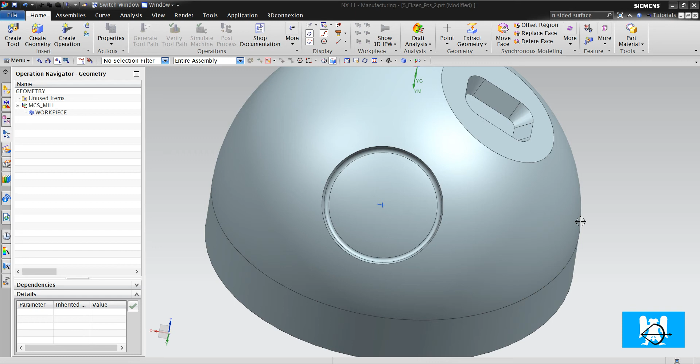Hi, I'm Yusuf. In this video, we will make the CAM operations for this part.

I defined the part and blank. We will make first the cavity mill.

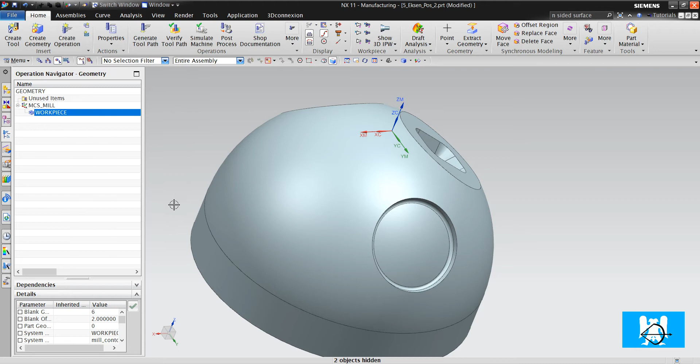Let me hide the point. We will make cavity mill for roughing, then mill semi-finish, and I click just generate.

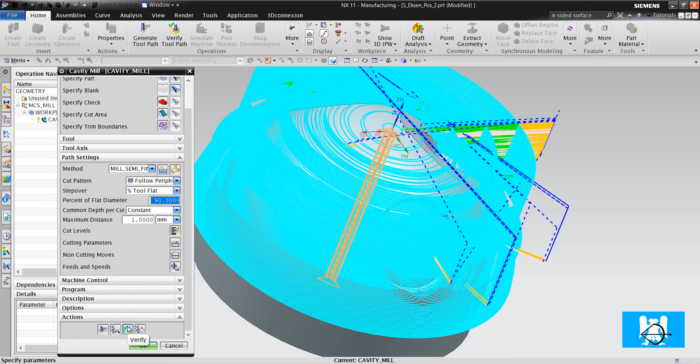For less air move, I change the height and transfer rapids. Let's verify that. We try 3D dynamic.

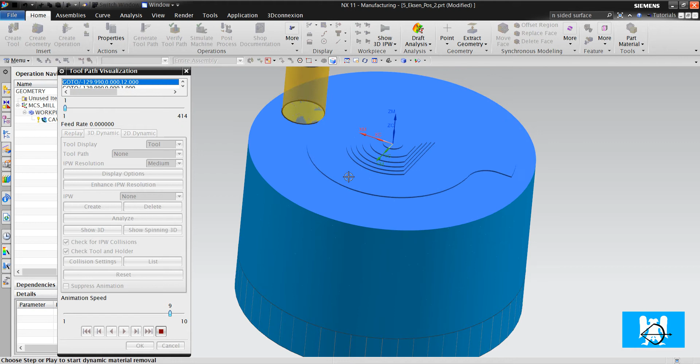I didn't fill the gaps for the slots and holes. If you want to fill the gaps, you can use n-sided surface.

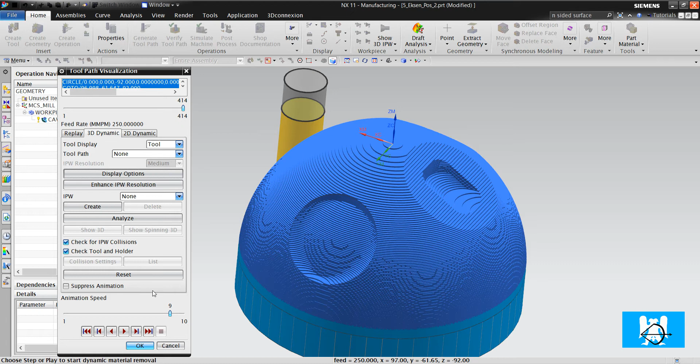Okay, let's make semi-roughs. We will machine these floors with floor and wall,

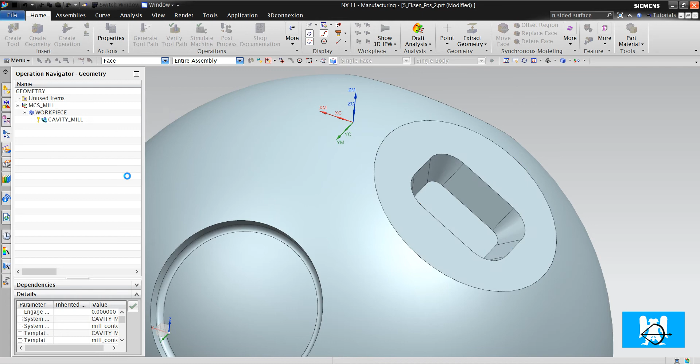mill finish. I just choose the floor, not tool axis or nothing more. Change the cut pattern and maximum distance and click generate.

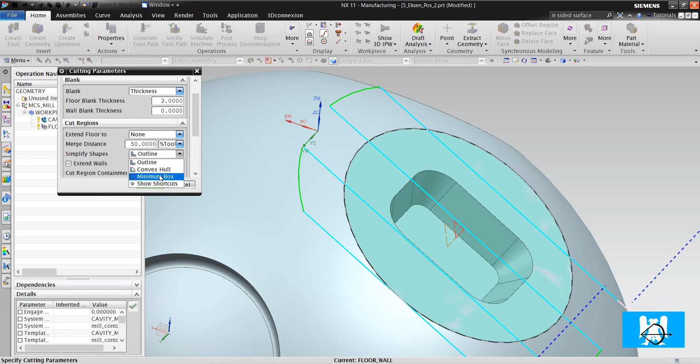Because it's circular, tool paths are circular. If you want it as a box, you choose minimum box and click generate again.

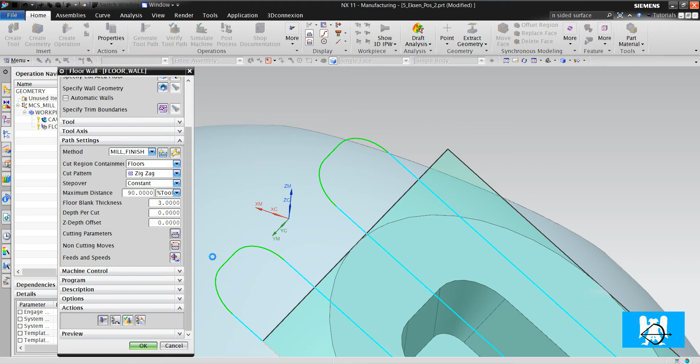Okay, these are cornered tool paths. If you want smoothing, you just open the smoothing and click generate. If you want smoothing in air moves, you switch to non-cutting moves, smoothing and smooth corners. And click generate again. You can see the smoothing.

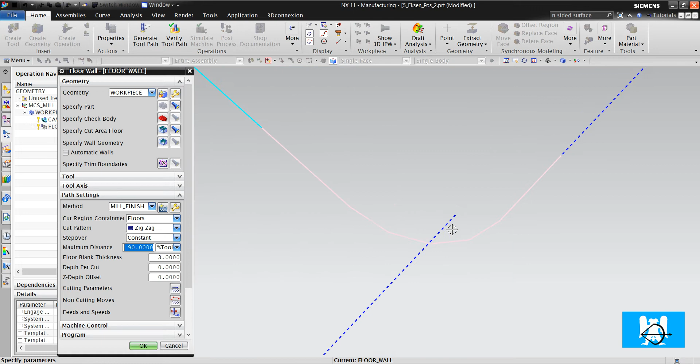Okay. We will make rest milling in this slot. Rest milling, D8 and semi-finish.

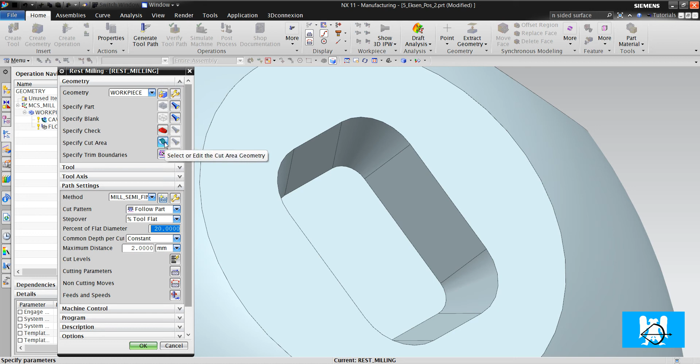In this 5-axis rough operations, I must specify the cut area and change the cut level. Top of range. Click OK and change the tool axis, of course. And change the tool axis again. Okay.

Special for 5-axis roughing, if you want to make rest milling, you shouldn't use level based, you should use 3D and change the transfer rapids. Allow periphery.

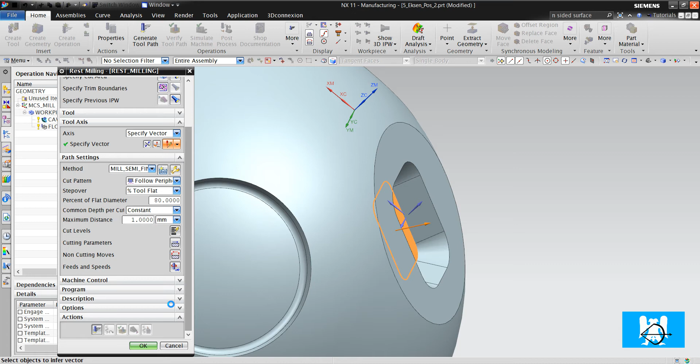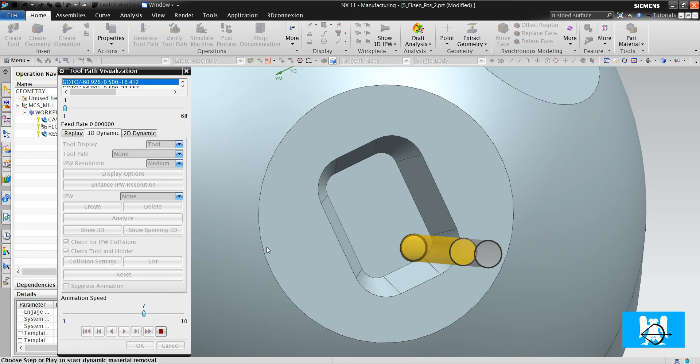And the rest milling is done. You can see that the tool just cuts the rest material. Okay, let's make finish for this.

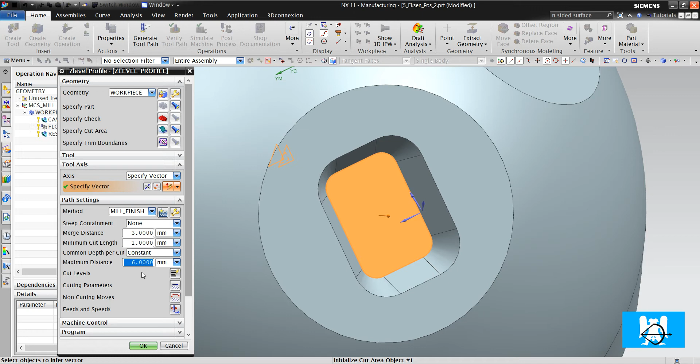Set Z-level profile and mill finish. I'll just choose the faces, choose the tool axis, define the maximum distance, cut between levels, stagger ramp on parts, and

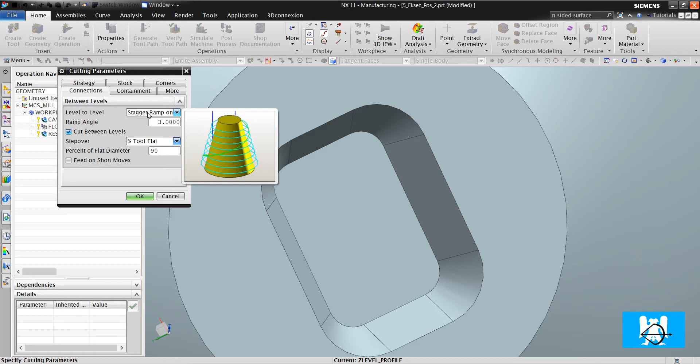percent tool flat. By opening this, we cut the floor, and by switching to stagger ramp on parts, I make a helical step over. I click OK and click generate. Okay.

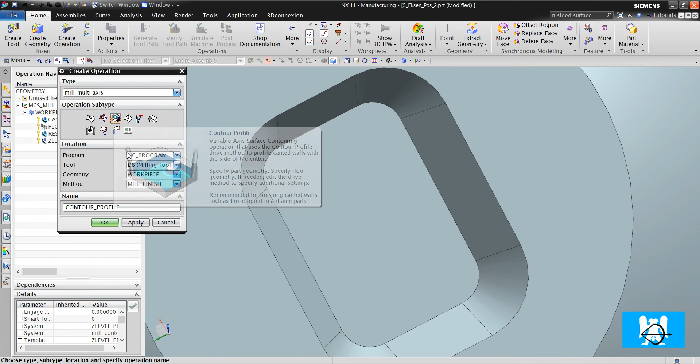If you have contour profile license, it's a simultaneous operation. You can just select the floor.

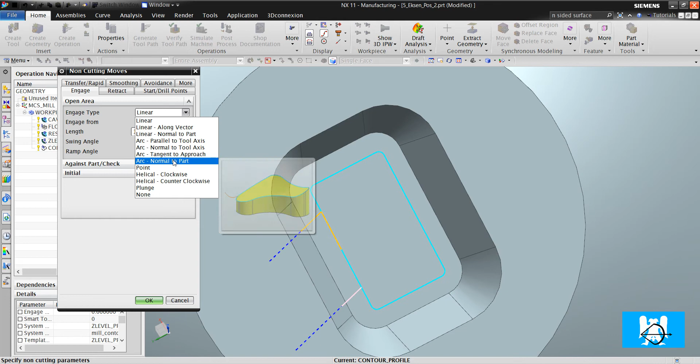It chooses the walls automatically, and when you click generate and change the non-cutting moves to normal to parts, normal to tool axis, you can cut the walls with flank swarf. You can make a swarf cuts.

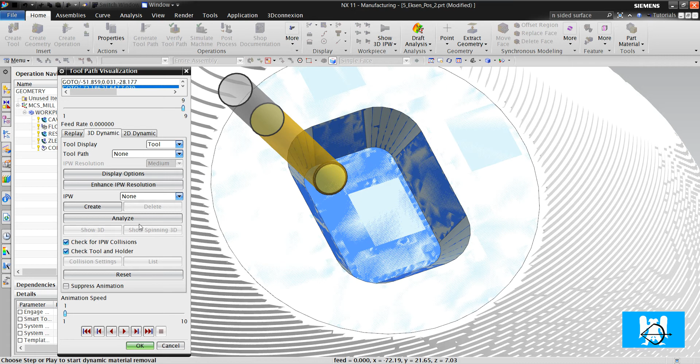But you must have a contour profile license. Old UG licenses don't have this bundle. Okay, I just copied this floor wall, paste it, change the floor, and click generate.

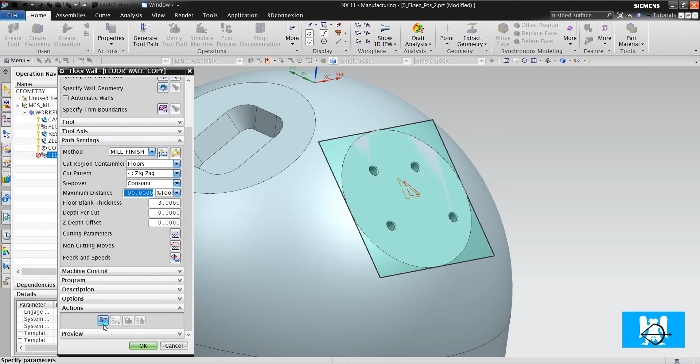There is actually a thread. I make a hole making and drilling operation.

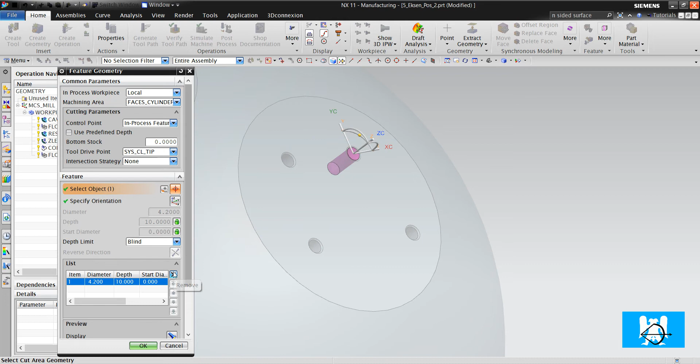You can choose these holes like this, or you can, let me delete them. To do this, you must change the MCS mill tool axis to all axis. It is +Z of MCS in default.

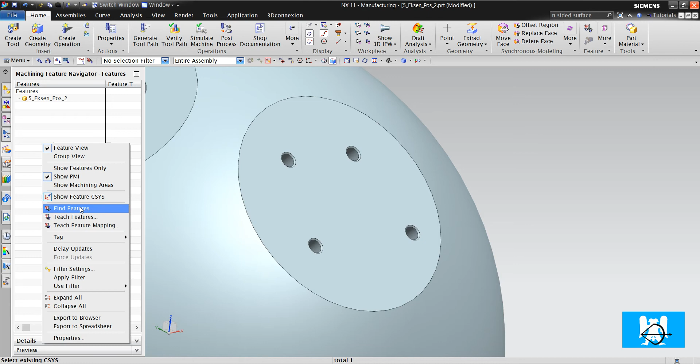Find features, steps, click OK. Group features. Okay, you can see that it found 4 holes.

Insert operation, drilling, drill deep, 5 millimeter and click generate.

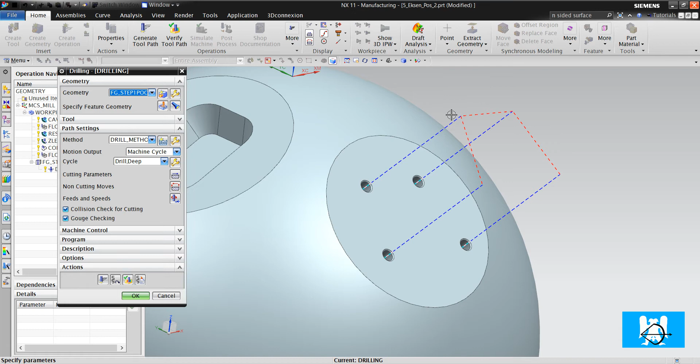To avoid this air move, transfer rapid, use safe Z type. Never use direct because it makes a gouging move. Generally, or sometimes it makes a gouging move, but don't use it. Use safe Z type and click generate.

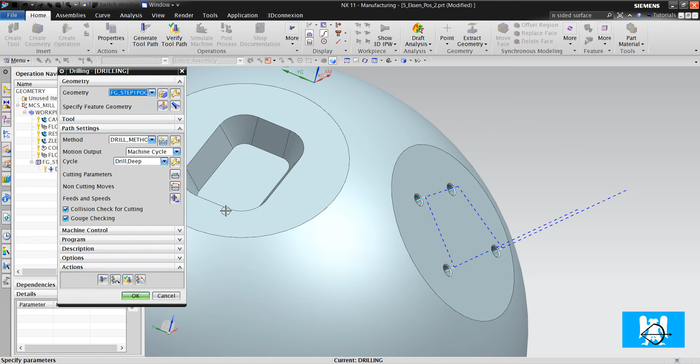To make the tapping, insert operation, tapping M5. You can see that taps.

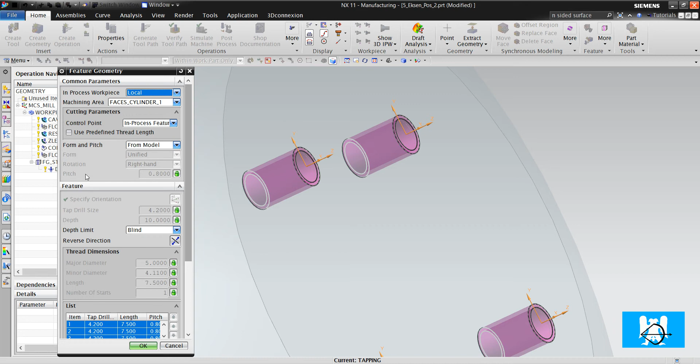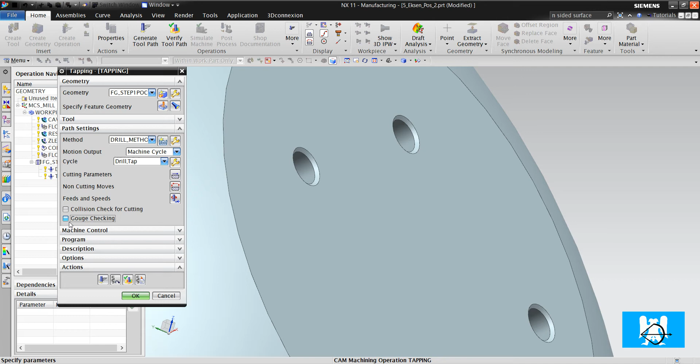There is the pitch 0.8. For tapping, you should change this cut and of course make a spindle speed, for example 150, and click generate, but you must first clear this options and of course change the transfer rapids.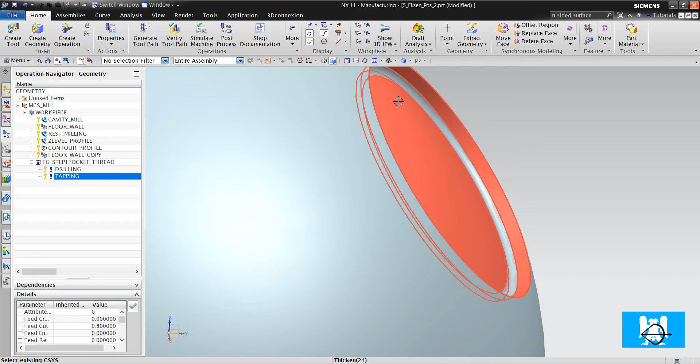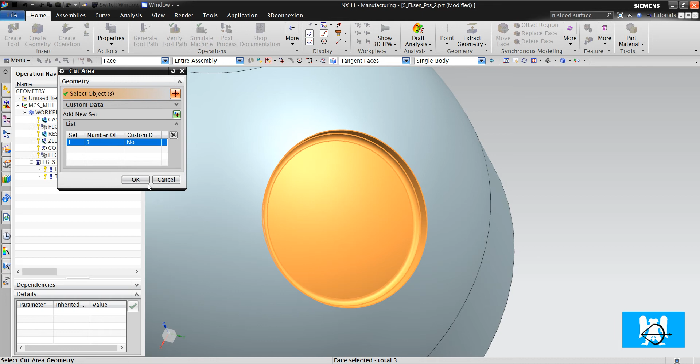Okay, I create operation and choose contour area, 4 millimeter ball mill and workpiece. I choose the cut area, but I must choose an axis. Until now we had a floor for axis, but now we do not have a flat floor. So what will we do for exact tool axis?

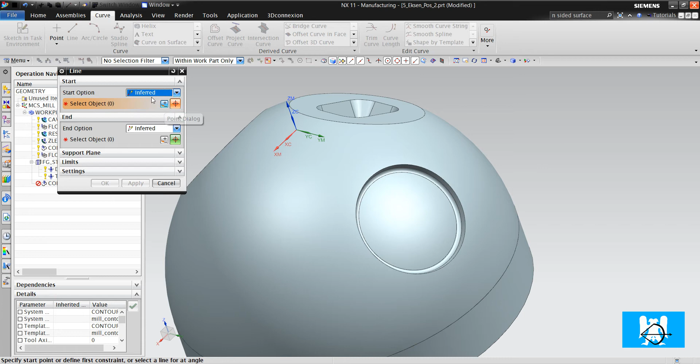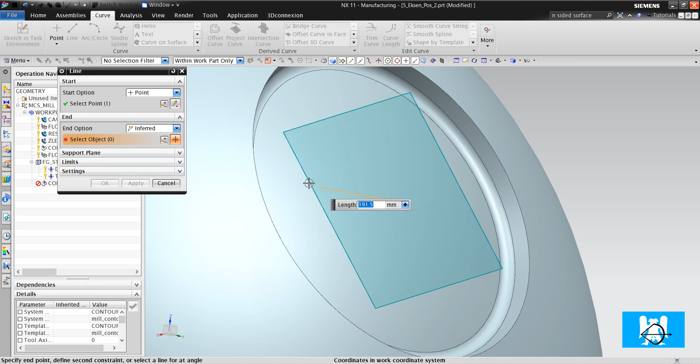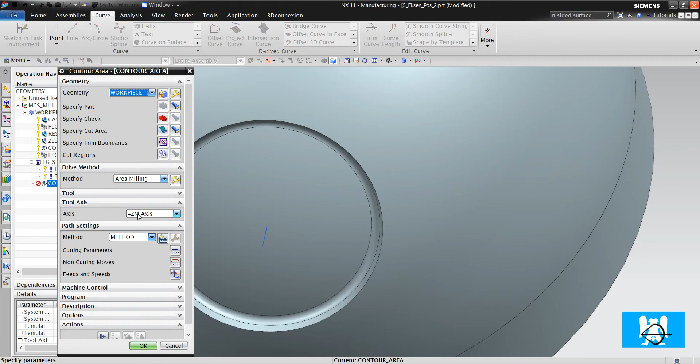Now I have a curve that's created to the normal of that face. So I can choose that axis and follow periphery, constant, 0.3, and on parts, and click generate.

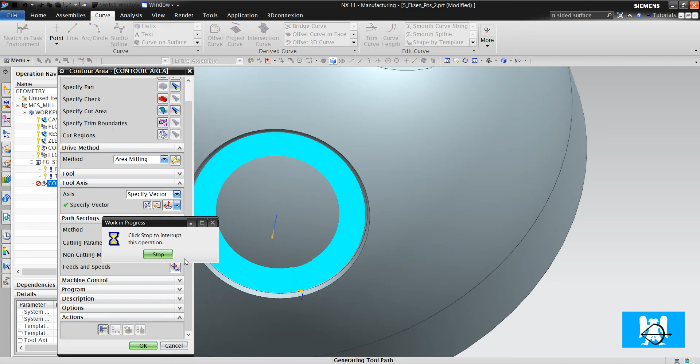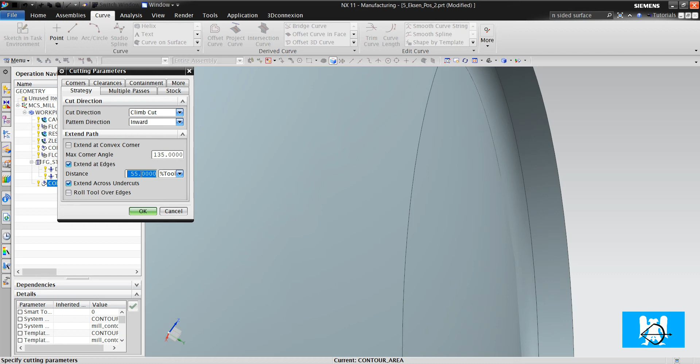Tool starts from here. If I want to extend the tool paths, I use cutting parameters, extend at edges, and 55% of tool extension. Okay, but now you can see this green step over color.

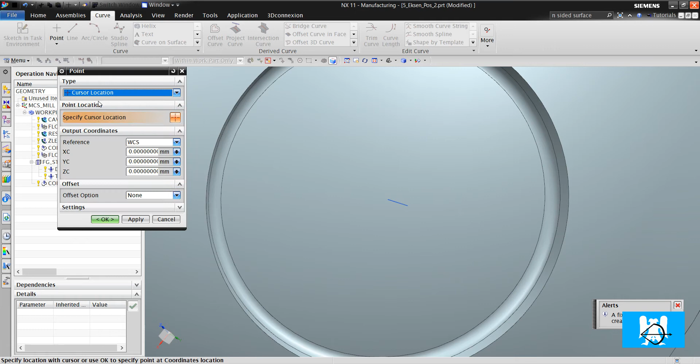We can make a streamline operation using this point and this edge. How? Streamline, I select the curve, add new set, point, helical,

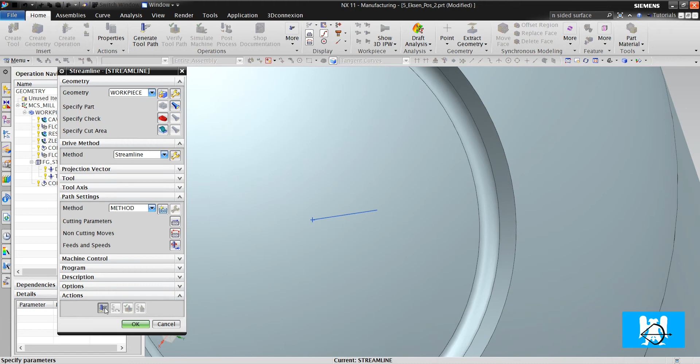constant, dot 1, tolerance, and click generate. As you can see, there's a problem because we didn't choose the tool axis. I choose it, and click generate again.

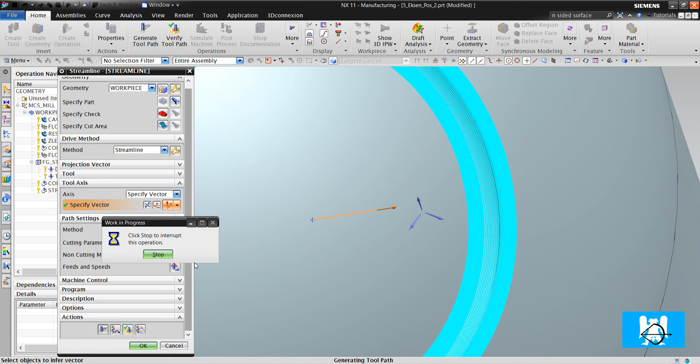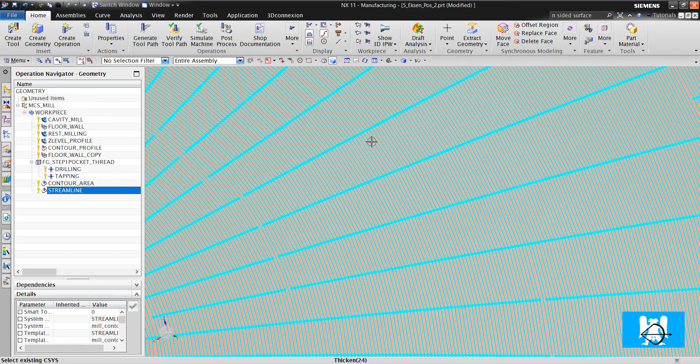Okay. I must remind something. As you can see, it is not a very fine toolpath.

Now you can see the difference. This is a finer toolpath.

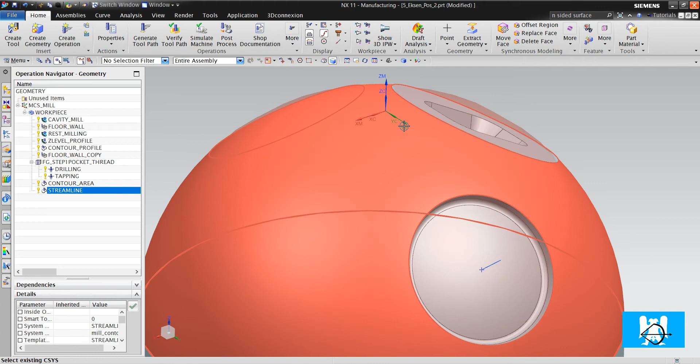Okay, the last step is machining this big formed area. You can just use contour area for this. Like this. You can switch to follow periphery, constant, dot three, and on parts.

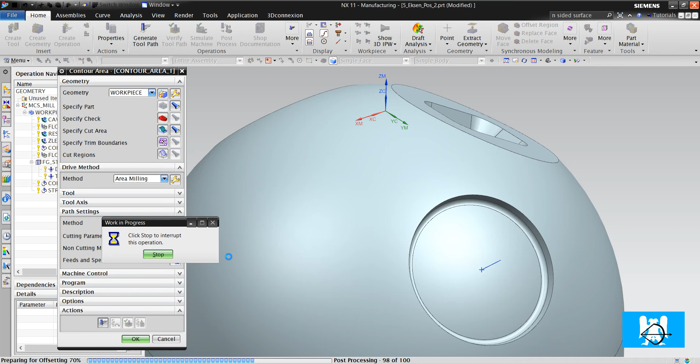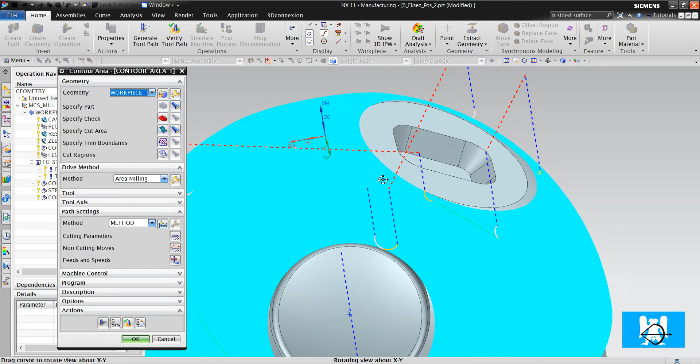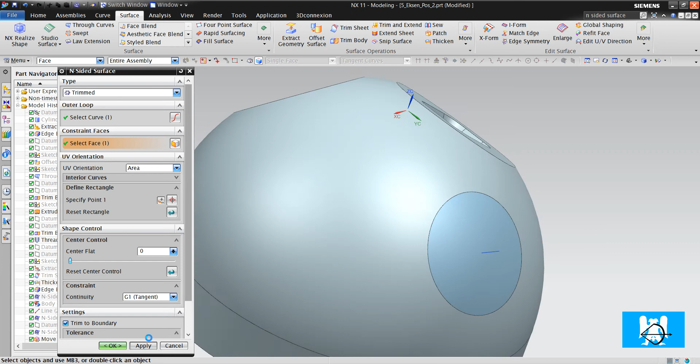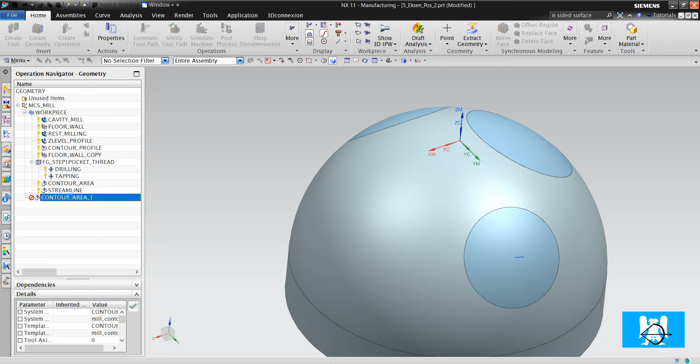Click apply. Click apply. We created our surfaces and then we will take it out of workpiece, choose the workpiece and sheet bodies.

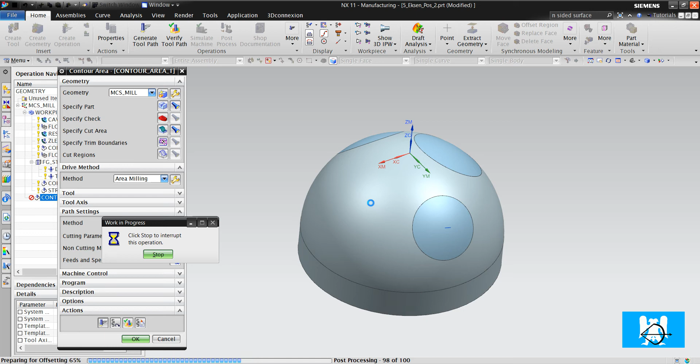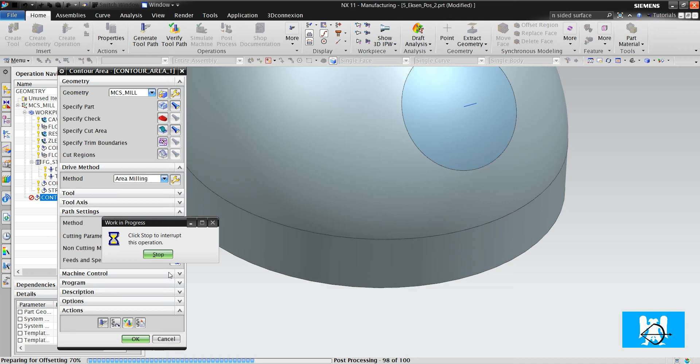And specify cut area. I will choose them from this place too and click generate. It starts from down to up. If I change it inwards, it will change, it starts from up and goes down.

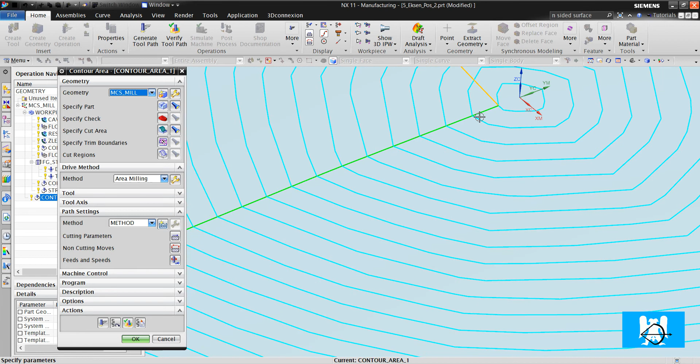But as always, you can see this green step over color as always in contour area, but we can use streamline to avoid them. I will not use workpiece, of course. I will choose parts, sheet body,

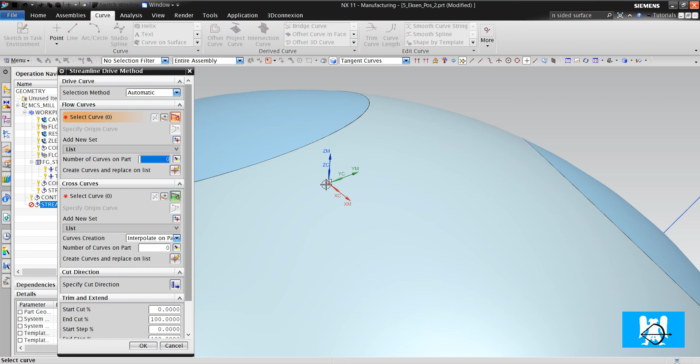first I must create a point. And first I choose that point, add new sets, and this edge. Drive settings, helical, constant, dot 3, click OK. I'll use normal to drive and click generate.

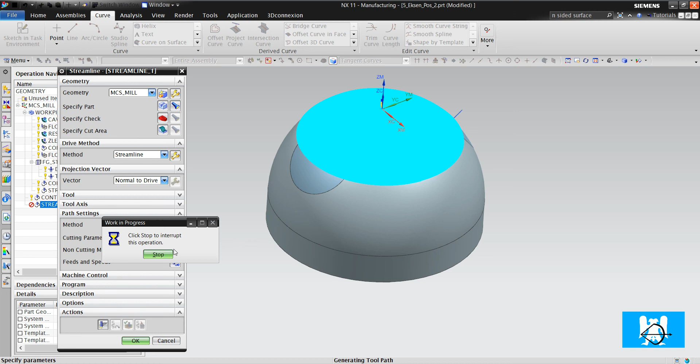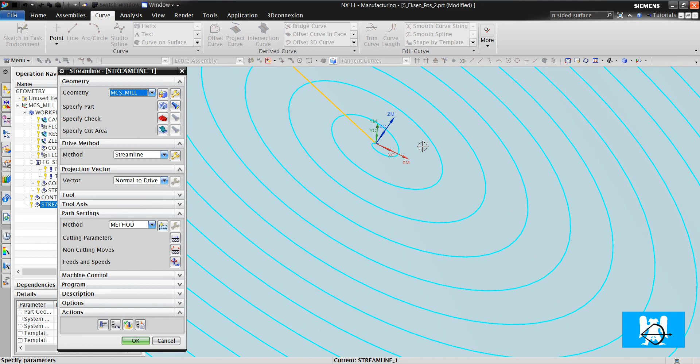As you can see, there is not this green color because it makes always spiral move. It is better than contour area for this part.

Okay, it's all for this part. Thank you for watching.